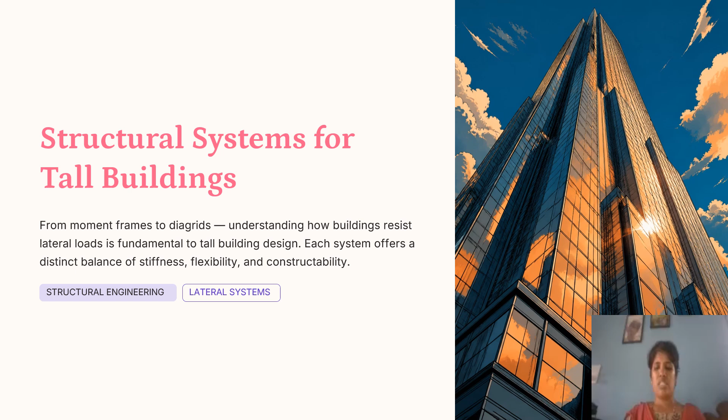So let's start. The lateral loads challenge. So let's start with the core problem. As buildings rise, wind forces rise. Seismic forces also, they don't just rise, they become the dominant design driver. The choice of lateral system isn't a secondary decision made after architecture. It shapes everything. Let me break this down into three critical aspects.

First, wind loads. Wind is a dynamic pressure and it increases dramatically with height. At street level, you might feel a breeze. At 400 meters, you are in a completely different wind regime. This drives two things: how much the building sways horizontally, and occupant comfort criteria. Because people don't want to feel like they are on a ship in a storm.

Secondly, seismic loads. Earthquakes generate inertial forces. The ground moves, the building wants to stay where it is, and the resistance creates enormous forces. We need systems with ductility, that is, the ability to deform without breaking, and energy dissipation capacity, the ability to absorb and dissipate that seismic energy.

Drift control, that is the third driving criterion. Excessive sway isn't just uncomfortable, it causes facade damage: cracking of cladding, failure of sealants. It can damage interior partitions, elevator alignment, and even mechanical systems. So, controlling drift is both a serviceability issue and also a durability issue.

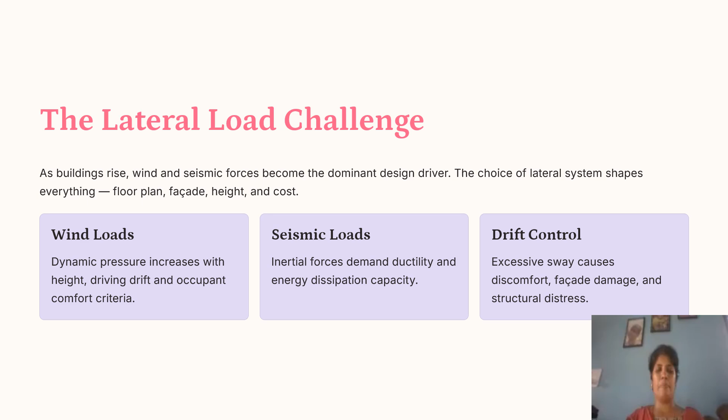So, why does a 10-story building not need to worry much about wind sway, but a 60-story building absolutely does? The answer lies in the relationship between height and lateral stiffness. As height increases linearly, lateral deflection increases by the cube or even fourth power, depending on the system. So, small increases in height create massive increases in sway. This is why lateral systems are the heart of tall building design.

So, firstly, the moment resisting frame. The simplest lateral system is the moment resisting frame. How does it work? Beams and columns are rigidly connected. When lateral loads push the building, the frame resists this push through bending. The beams bend, the columns bend, and the rigid joints transfer moments between them. It's elegant in its simplicity. It is best for buildings up to roughly 20 stories. Beyond that, the system starts to struggle.

The tremendous architectural flexibility is its major advantage. Open floor plans, large windows, minimal obstruction. This is the system architects love. You can place walls wherever you want. You can reconfigure interiors easily. The structure doesn't dictate the architecture.

But what is the limitation? Lower lateral stiffness. As height increases, sway becomes excessive. Drift controls the design. You end up needing enormous beam and column sizes, which become economically and spatially inefficient as well. At some point, you are throwing more and more steel at a problem that a different system could solve more elegantly.

Think of it this way: a moment frame is like a person standing against a strong wind by just flexing their knees. It works for a while, but eventually you need to plant your feet wider, brace yourself; you need a different strategy, right? So moment frames are a starting point. They are where we all begin, but they are rarely where it all ends.

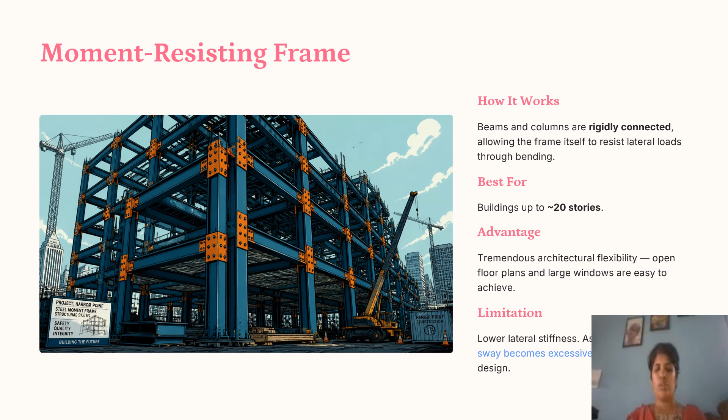So what happens when we need more stiffness? Without jumping to concrete walls, we add bracing. How does it work? Diagonal members create triangulated panels. Now, lateral forces are transferred through axial tension and compression in those diagonals, not through bending, and axially loaded members are incredibly efficient. A thin steel rod in tension can carry enormous loads.

So the major advantage is high stiffness at low cost. This is one of the most economical lateral systems available. You are getting a lot of lateral resistance for relatively little material. But what is the limitation here?

With these triangular bracings, openings, windows, doors, and circulation paths all have to work around the diagonal members. This is the classic tension between structure and architecture. The structural engineer wants diagonals everywhere, but the architect wants clear views and open paths.

There are variations, of course: X bracing, with the highest stiffness; K bracing and V bracing, which allow larger openings by meeting at central points. Chevron bracing is another, which keeps the ground floor open, but the fundamental trade-off remains stiffness versus architectural freedom. Whenever the stiffness is more, architectural freedom gets reduced.

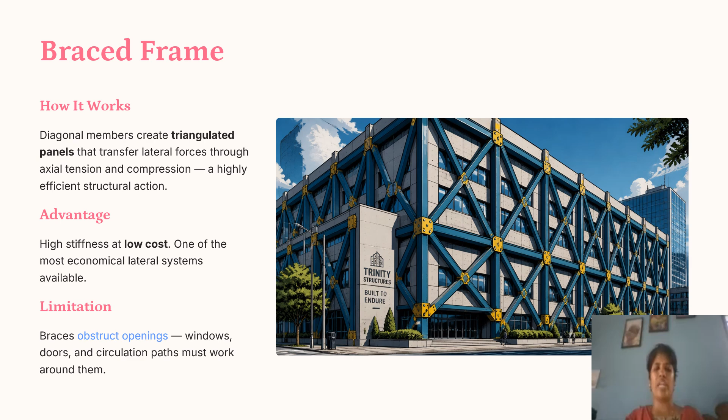And there is another alternative, the shear wall system. It is a system which is pure stiffness. Solid reinforced concrete walls carry lateral loads. They are not thin partitions. These are substantial walls, often 200 to 400 mm thick, extending continuously from foundation to roof. They act as deep cantilever beams resisting shear and moment.

The strength, obviously, the excellent lateral stiffness and drift control is there. In high wind and seismic loads, shear walls are often the go-to solution. They limit sway dramatically. They provide a sense of solidity that other systems can't match. But they severely restrict floor plan flexibility. You cannot put a door through a shear wall without major structural consequences. You can't have an open plan that cuts through a shear wall. The wall locations dictate the architecture.

This is why shear walls are common in residential towers and hotels, buildings where wall locations naturally align with unit partitions. Every apartment has walls anyway. If those walls are structural, it is a win-win. The architecture and structure align. But in an office building that needs large, open, reconfigurable floor plates, shear walls become a burden. You end up with a central core of walls and limited perimeter flexibility.

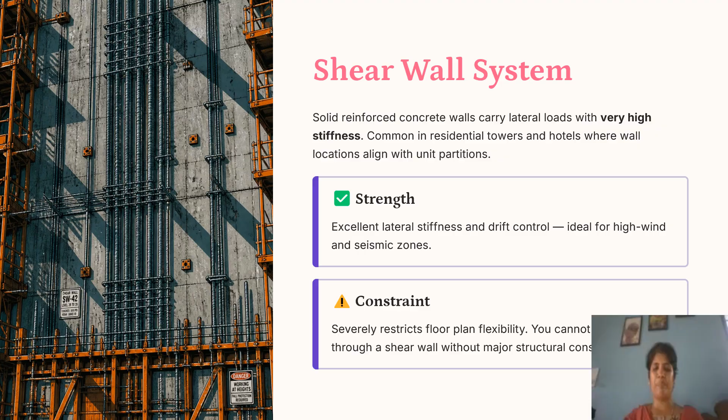It is a system which teaches us the best structural system is one that aligns with rather than fights against the architectural plan. When structure and architecture are in harmony, both perform better. In the frame core system, the perimeter frame carries the gravity loads. It's a division of labor. The core acts as a deep cantilever beam. Imagine a concrete box rising from the ground, resisting wind like a tree trunk. Meanwhile, the perimeter frame can be lighter, more flexible, because it is not doing the heavy lateral lifting.

But the limitation is that it limits planning at the building center. Large open spaces must work around it. You can't have a grand atrium through the core. You can't have a column-free ballroom at the center. The core is non-negotiable. But here is the thing. In most tall buildings, you need a core anyway. You need elevators, you need stairs, you need mechanical shafts. So the frame core system doesn't create an obstruction. It leverages an existing necessity for structural benefit.

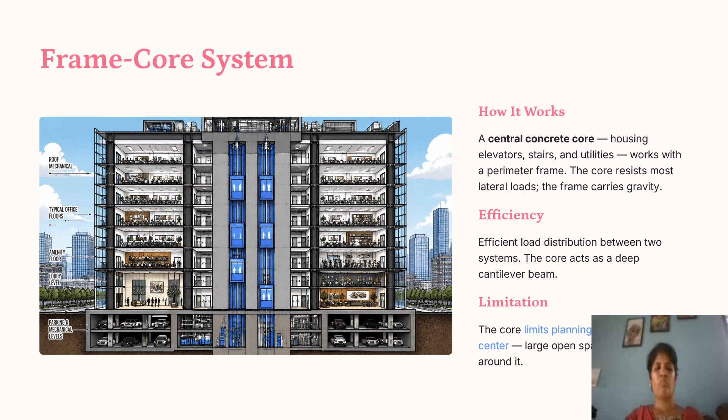It is one of the most common systems in modern tall buildings, particularly in the 30 to 60 story range. It's efficient, proven, and relatively straightforward to construct. Burj Khalifa, for all its complexity, still uses a core-based system at its heart. The frame core system represents a mature understanding of tall building behavior. Let each element do what it does best.

Next comes the tube system. Now we enter the realm of very tall buildings, 50 stories and above, and the system that made them possible, the tube system. The entire perimeter becomes a rigid tube, like a hollow box column. Closely spaced columns and deep spandrel beams create a continuous structural shell. Lateral loads are resisted by the tube acting as a cantilever, and the interior is completely open. No columns, no braces, no walls.

This was revolutionary. Before the tube system, very tall buildings needed heavy interior structures that fragmented the floor plate. The tube system said, move the structure to the perimeter, make it work as a shell, and free the interior. And who is the pioneer? Fazlur Khan, at Skidmore, Owings and Merrill in the 1960s. He is arguably the most important structural engineer in the history of tall buildings. His tube concepts, framed tubes, tube in tube, bundled tubes, extended the practical heights of buildings by hundreds of meters.

And a few examples: the John Hancock Center in Chicago, and the Willis Tower, formerly Sears Tower, which uses a bundled tube system, nine tubes of varying heights creating that distinctive stepped profile.

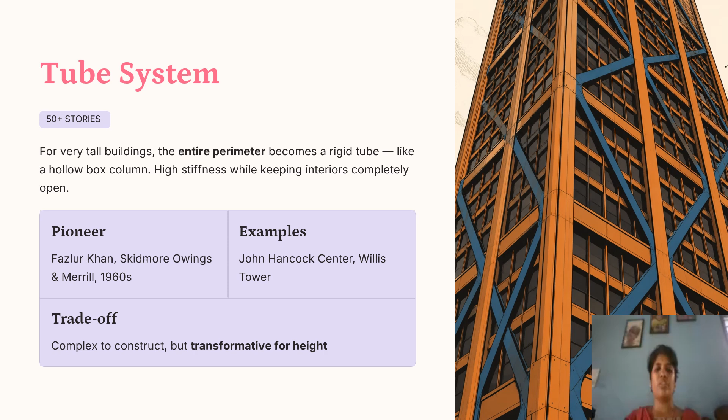And here comes the next: outrigger and belt truss. As we push into super tall territory, 300 meters and above, even tube systems need help. There comes our hero, outriggers and belt trusses. How does it work? Outriggers are rigid arms, typically steel trusses or concrete walls, that connect the central core to perimeter columns at specific levels, usually mechanical floors. And belt trusses tie the perimeter columns together at those same levels. And the result, the entire building perimeter engages in resisting lateral loads, not just the core.

Think of it this way: without outriggers, the core is like a person trying to resist a push only with their spine. With outriggers, it is just like a person planting their arms against a rigid ring. The whole body engages. It is best for super tall buildings where drift control is critical. When you are building 400, 500, or 600 meter tall buildings, every millimeter of sway matters. Outriggers are one of the most effective tools for controlling the drift.

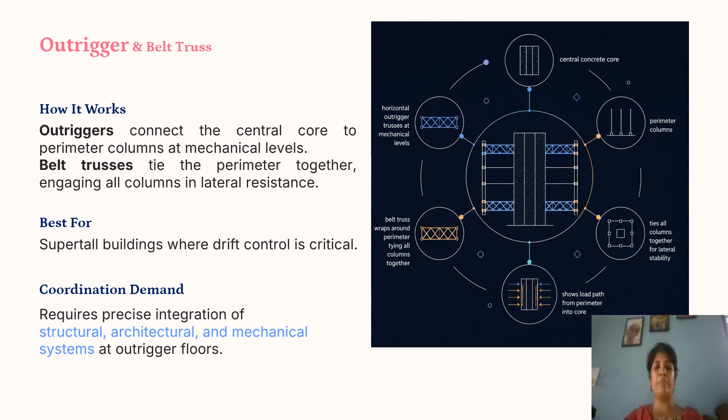This is where things get complex. Outrigger floors require precise integration of structural, architectural, and mechanical systems. Those mechanical floors aren't just housing equipment anymore. They are structural battlegrounds. Every discipline needs to align. You can't just add an outrigger without thinking about where the elevators go, where the ducts run, where the facade breaks. It requires integrated design teams working from day one, not sequential handoffs. Outriggers represent a point where tall building design becomes truly interdisciplinary. Structure alone isn't enough anymore.

And next, diagrid and hybrid systems. Finally, let's look at the cutting edge. Instead of vertical columns and horizontal beams, the exterior is a diagonal grid. The diagonals carry both gravity as well as lateral loads. This eliminates the need for many vertical columns. The result is visually striking. Buildings like 30 St Mary Axe in London, known as the Gherkin, use diagrid principles. Structurally efficient, architecturally expressive,

but complex fabrication and erection raise cost significantly. Every joint is unique. Every diagonal is precisely angled. The tolerances are unforgiving. Diagrids are beautiful, but they demand craftsmanship at scale. Hybrids are where we combine multiple approaches, core, frame, outriggers, tube, into a single optimized system. For super tall buildings, hybrids are increasingly the norm. The Shanghai Tower, for instance, uses a core, a double skin facade that acts structurally, and outriggers. It's not one system, it's a synthesis.

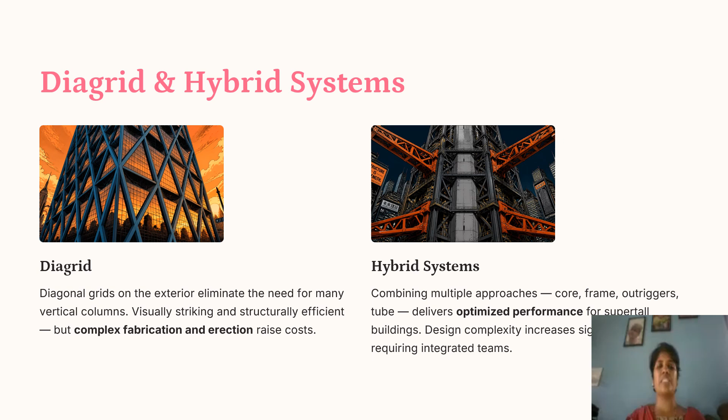And what is the challenge? Design complexity, of course. You need integrated teams, advanced analysis software, and often full scale testing. Margin for error shrinks. The coordination demands expand, but for performance, it's quite optimizing. Hybrids allow us to push heights that no single system could achieve alone. Diagrids and hybrids teach us a final lesson. The future of tall buildings lies not in choosing one system, but in intelligently combining many.

So, this is a very big question. How do we choose? Let's have a quick reference. Moment frame, it's up to 20 stories. Next, braced frame, it's up to 40 stories. Shear wall, it's up to 50 stories. Frame-core, from 30 to 60. And tube system goes above 50 stories. Whereas outrigger and belt truss, as well as diagrid and hybrid, these two systems are mainly for super tall structures that are more than 300 or 600 meters. So the frontier of tall building design lies here.

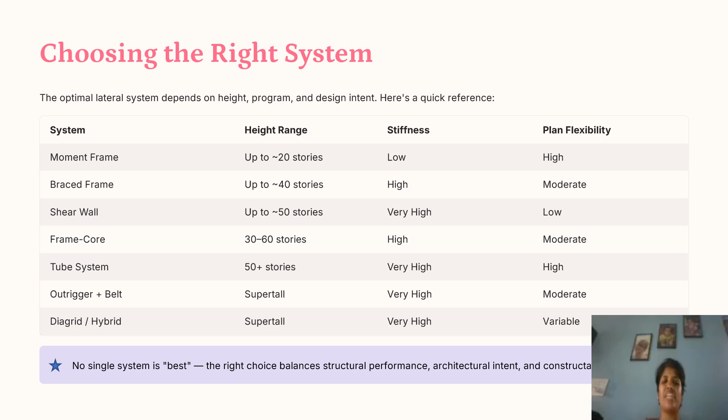But remember, no single system is best. The right choice balances three things: structural performance, architectural intent, and constructability. A system that is structurally perfect but architecturally unworkable is a failure. A system that is architecturally beautiful but impossible to build is a fantasy. The art of tall building design is finding the sweet spot where all three of these align. Height drives structural need, program drives spatial need, budget drives constructability need. But the best engineers are those who can navigate all three simultaneously.

To summarize, what we have covered today is lateral loads and the challenge, the lateral loads that dominate tall building design. There are in total 7 structural systems, from simple moment frame to complex hybrid. Each system offers a unique balance of stiffness, flexibility, and constructability. So system selection is an integrated decision of engineering and also architecture.